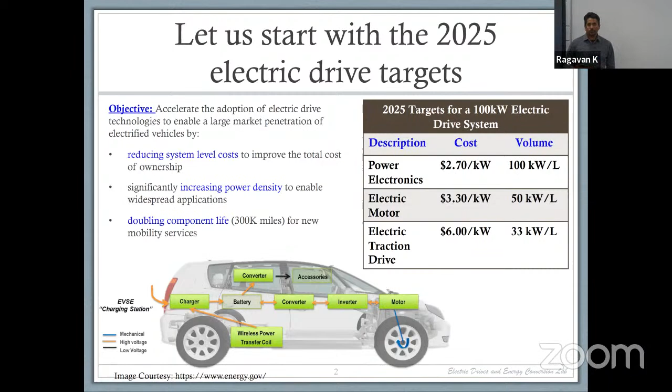So like I said, even though our expectation was the same, we now have drive cycles. But the problem is each of these vehicles has a different driveline target. What this basically means is that you might be looking at 15 miles per gallon for one situation, but they don't start and stop at the same time. They don't have the same weight distribution. So our goal for 2025 compared to 2015 basically means we have lowered almost all of our metrics by quite a bit.

I also have a comparison of 2025 and 2020 that you will see later, and you'll see specifically that we are still aggressively pursuing numbers that make us have to control or innovate to create the right outcome. So in terms of power density, what you see here is that we have an 843% increase, which means you're going to go 8.5 times what the numbers were barely 10 years back. Actually, 7 years back even now.

Power level, we want to double it in 10 years. We want to have about 100% increase in reliability. So now we want our drivetrain to last us 300,000 miles, not just 150,000 miles. And the power electronics is going to be 50% cheaper. So as you can see, we want everything to be higher except for the cost, which we want to cut down in half.

Without a doubt, you cannot create a solution that fits all of these metrics without looking at the overall system. So we looked at different ideas of what we could do. We touched on individual components. We looked at thermal management, NVH. We looked at windings and steels. We also looked at an idea of integrated drive design. Actually, we looked at it a little bit. We talked about controllers and power electronics.

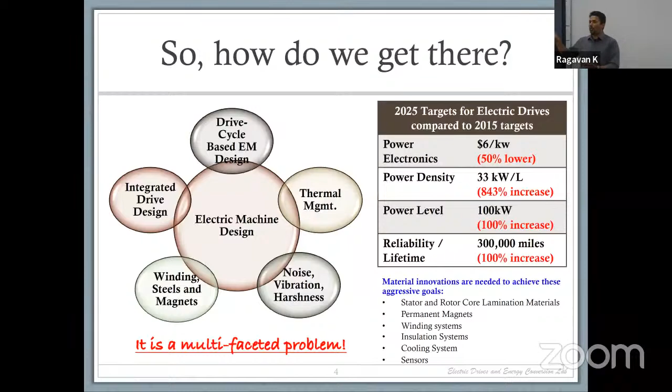What we're going to do today is we're actually going to combine these last pieces. This is just a vision that I have in terms of how I would want to achieve something like this, and I'm more than happy to get some feedback from you. So the idea of the integrated drive framework really is to develop a flexible and time-efficient framework within the optimization framework that also considers the drive cycle. You want to include the multi-physics domain, and you also want to do current shaping.

Like I said before, you cannot do it sequentially, because sequentially it is difficult to manage one without adding a ton of time to your simulation time. So the approach really is you start with the drive cycle, you create the surrogate model, and you do this coupled optimization. We talked about this yesterday. Today we are going to bookend this topic with the first and the last task in this project.

But the idea really is, for the 2012 drive system, $30 per kilowatt, to now 2022, we had $8 per kilowatt. And now we are trying to go to $3.30 per kilowatt. So the numbers that are changing are quite aggressive, which means in order to achieve this outcome, we need to have highly efficient motor designs. We need to have materials, which is not something we are focusing on right now. We need to have manufacturing methods, thermal management, additive manufacturing, and high performance computing. We are trying to focus right now on the first and the fourth topic for the purposes of this project.

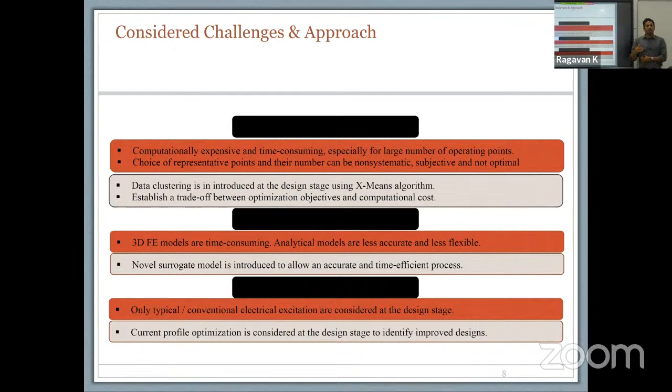So basically what you're doing is something like a Newton-Raphson method, like I said before. It's just like what you do for power systems. You don't necessarily have to know the answer. You just know what your boundaries are for each one of them. You keep iterating until all of them are within the error tolerance that you have. And once you meet all of them, you're good. It doesn't have to be the exact number. And depending on how many iterations you go for, you get that much closer, right? You're basically converging to a solution.

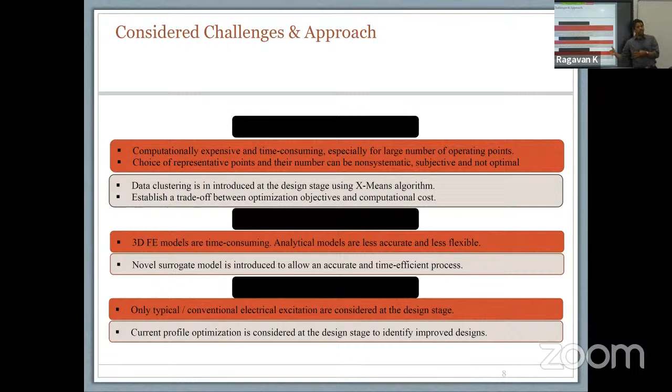The idea here is quite similar. You're trying to converge to a solution, except that instead of doing a ton of simulations, I'm converting that into a bunch of surrogate model-based drivetrains. So this is now where we are going to start. We start with the drive cycle. The drive cycle actually gives you a torque speed profile. The torque speed profile gives you what's called RPs, or representative points. So let's start with what it looks like.

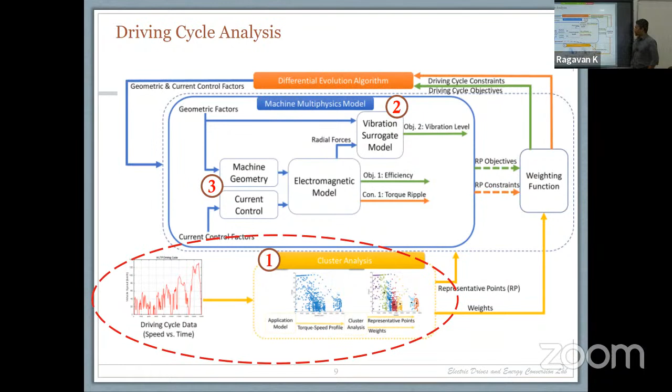So the optimization can basically have a single or multiple operating points. Why? Well, because that's how your system could be. You might end up with a system in which your point clusters are close. There's only 2 of them, because it mostly operates in these 2 modes. It could be something like an HVAC system where you don't change your operating speed very much. But in a drive cycle where your speed versus time varies so much, you end up with a torque speed spectrum that moves around a lot.

So this is the WLTP drive cycle, now translated to this torque speed map. What this tells you is that if you are designing it for, let's say, the torque speed profile that you would normally have, oh, sorry.

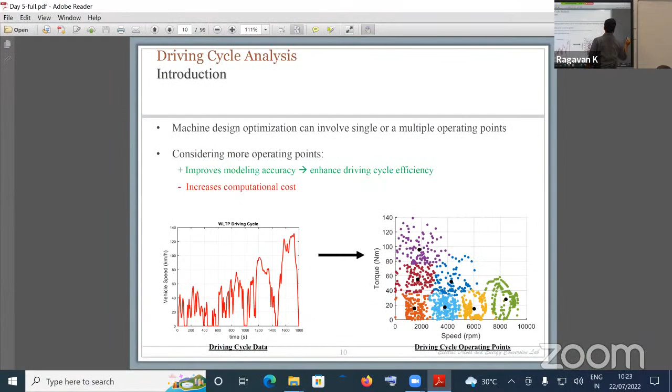Okay, so if you had designed it for something like this, if this was your torque speed profile, and this is what you had originally done it for, you typically have designed your motor somewhere around here, right? Instead, now what's happening is, if you design for this motor, now look at this here. This point here, the high speed operation, doesn't happen that much. The low speed operation, now you're designing it for this point here.

So let's say you have your highest efficiency point somewhere here. You're operating a lot in this region. So now you see you are fairly distant from your highest efficiency point. So if this was, let's say, about 94%, this might be somewhere around 90 or 89%. So you see what happened here. It's not that the original design was wrong. It's just that it was not designed to be optimal for your given system.

So what we are talking about basically is converting this into a map where you look at these clusters. So you create these clusters here. There's one cluster here, one cluster here, a small cluster here, a big cluster here, a small one here, and a small one here. So keep in mind, the cluster is not necessarily sitting on the points. It is coming from the points where it operates. You're trying to get a point that is most representative of what your operating points need to be.

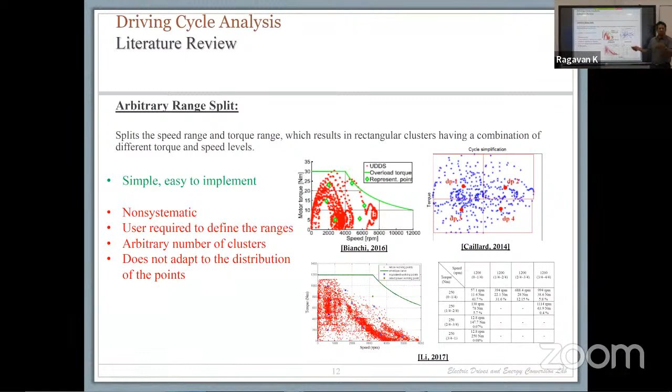So I guess at this point, the point I'm trying to drive home is the fact that you need to start having something that is repeatable and can actually be verified by somebody. You cannot have somebody who comes in and says, no, I know this better. It's not like driving a car. It should not be so arbitrary that somebody can always do it better than you. There should be a method to the madness.

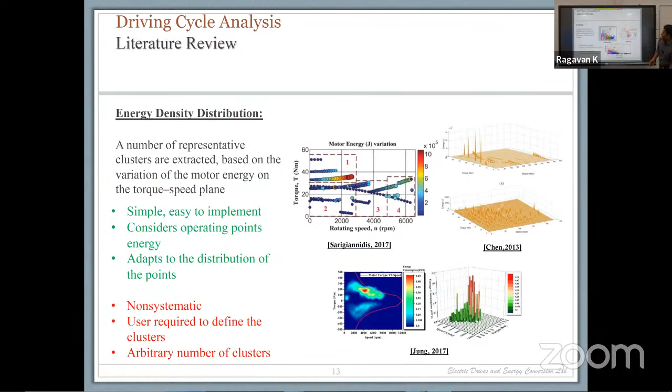Okay, so the next one basically is called k-means. So k-means actually is an interesting idea. This is where we initially started. We started with the idea of creating k clusters. The idea was basically you create a predetermined number of clusters. So in this case, you have k clusters where each point belongs to the cluster that is nearest to its centroid. So the idea itself was reasonable. That was where we wanted to go.

So there were several people that had actually done something like this, where they look at each range that creates that cluster of points, and they assign a value to it based on the magnitude. They calculate the centroid and say that centroid is basically my point that I'm using. It is a systematic approach. It does adapt to the number of points you have, but you are still defining k, which means somebody is telling you how many clusters to go with.

Now the question is, how do you define that? We're not saying it's wrong. None of these methods are wrong. All of these methods work. The question really is, what is the optimal method that you can establish that creates something that is repeatable and reproducible? And as a consequence of k, your number of clusters remains arbitrary. Right? So I'm hoping at this point I'm making sense more than trying to convince you that this is the way to go. That's not exactly what I'm saying at all.

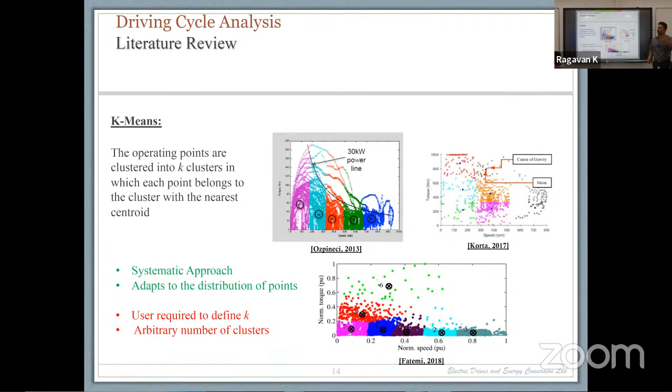I'm just saying, look at your system. You have your overall objective. Look at the system before you start designing. If you start designing and then hope you hit the number you want, there's a very good chance you don't. So x-means is the method that we actually used.

X-means essentially refines the cluster assignment specifically. It keeps breaking it down into subdivisions, and it keeps the best resulting splits until you get a Bayesian information criterion. That's a big factor that you get. That BIC is basically the point that tells you how many clusters your system should have. So it keeps splitting your clusters over and over again, trying to figure out if you get the right number of clusters, will this still represent the points you need?

The benefit is that it's systematic, which means you get a significant gain in accuracy and computational cost. It adapts to the number of points. It gives you the optimal number of clusters, and compared to visual inspection or any of these methods, it gives you a much more thought-out approach that is user-free, and the optimum number of clusters is automatically determined. So you don't have to select how many you need.

We actually did a comparison, specifically showing what happens if you have more than that number of points. It's something like harmonics, right? When you do harmonic analysis or Fourier analysis, you go up to a certain number of terms, right? The order of harmonics you pick, 3, 5, 7, 9, whatever it is, and then at some point you say, if I add more, it's not going to change anything. Sure, it'll give me the 4th decimal point of accuracy, but I can live without it.

Same idea. So you're basically saying, I could do with 7 points, but do I need 7 points? What if I could get by with 4? How do I make sure I'm doing that? Because keep in mind, it's not only electromagnetic. I'm taking it from electromagnetic, coupling it with vibrational, taking it to acoustic noise, and doing thermal, which means every single one of my points is going to cost me a lot of time and a lot of resources. So I cannot afford to do that many times.

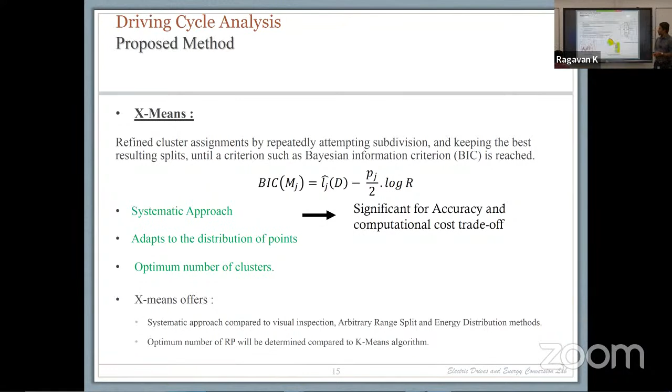This is actually one of the examples we have. By the way, we have papers that you can take a look at later as well if you want. So the idea was we took an IPM and we wanted to create a method for doing analysis to see how my operating point would change, how my performance would change if I used each one of these methods.

So we did the optimization on a single operating point. We did it on x-means, which gave me 2 points, and then we went to k-means, which gave me 7 points. So our method says 2 points is good. K-means says, well, based on the clusters, based on what I'm seeing here, if you go back to clusters, that's this one here.

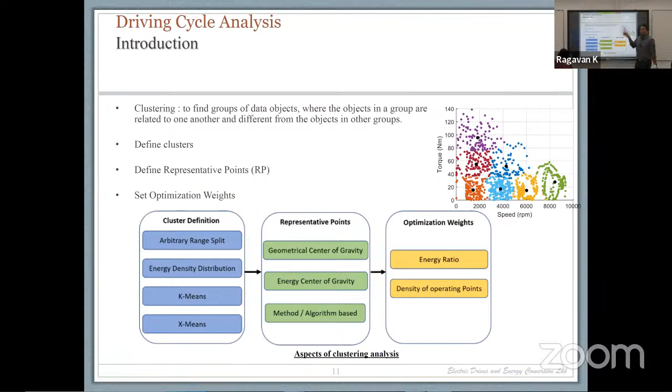This one. You see this: 1, 2, 3, 4, 5, 6, 7. There's 7 points here. So K-means, by visual inspection, or basically when you broke them down in terms of the centroid, you said 7 points, that's a good representation. But we said, based on our calculation, we found that 2 could get the job done. Once again, it's a starting point. You might not get the right answer, but we had to see what the variation was going to be.

The application was for an IPM for traction, electromagnetic model only, because we had to start somewhere. And then we did 12 design variables for geometric optimization, and your drive cycle was still the same, WLTP. What that means is that we are trying to look at 12 components of your design spec. So you're changing the rotor length, the back iron, the thickness, the arc length. So you defined 12 variables that we wanted to optimize for.

Keep in mind, now those variables are being optimized for electromagnetic. You will then also be looking at vibrational. You'll be looking at thermal. So that many design variations, looking at every one of them is definitely going to be time intensive. So here are the points here. It's the distance between the magnet and the rotor OD. You have the notch that was created. You have the length of your slot, the pole, width of your pole, the back iron. So you had a bunch of variables. We defined 12 of them.

So based on that, we essentially calculated what our drive cycle is going to look like. And if you break it down, this is your cluster, right? So when you look at this breakdown, this looks easier to spot where the points could possibly be. But if you look at something like this, the colors, in my mind, kind of bias you just a little bit. Because when you look at the colors, you start looking at those colors clustered together. You look at the same points without any filtering, then you kind of think that maybe there's only a few points that you need to work through.

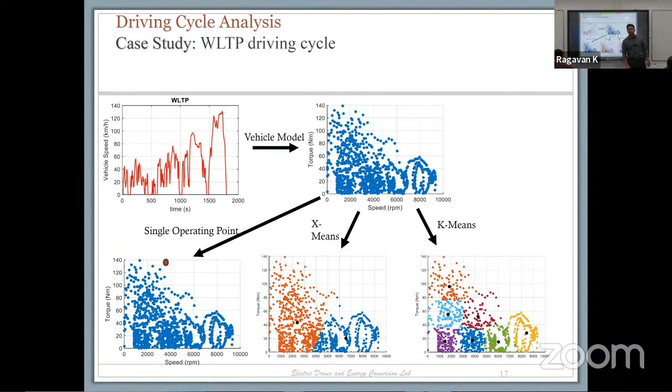So instead, you can see this one with blue comes out at 2 operating points that we defined. So we said this point here and that point here should be able to represent our values accurately. So this is the overall torque speed profile that you get versus efficiency for all 3 of these methods. If you do the design for a single point, you see your optimal point is somewhere around 4,000 RPM. When you go to x-means, you're still around 4,000 RPM, but that range has gotten wider, it's gotten bigger. If you go to k-means, once again, 7 points, it's still big.

But guess what? When you look at the numbers in terms of efficiency, x-means and k-means gave you nearly the same efficiency. So I'm not saying x-means has to be better. I'm just saying it has to be faster. Because I'm not just looking at how efficient my design is. I know most designs work. If you use FEA and there is no visual inspection, you just keep designing the motors, you will get a good design eventually, right? It's just a matter of how long all that takes.

So what we found out here basically is, in terms of the normalized computational cost, your k-means actually took 1. Your A, which basically was single point, took 0.11, and B, which is our x-means, took 0.25.

So that's the computational cost. So clearly x-means is more expensive than a single point. But then we knew that. I mean, the first one had 1 point to be evaluated for, the second one has 2. So there's no surprise there. Average efficiency here 96.4, 96.2, 1 point is 95.2. So this will start changing.

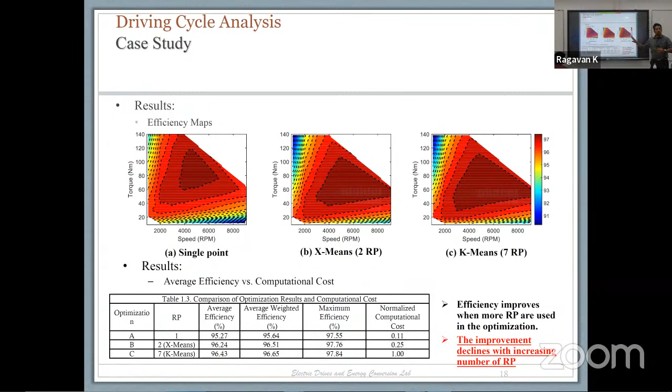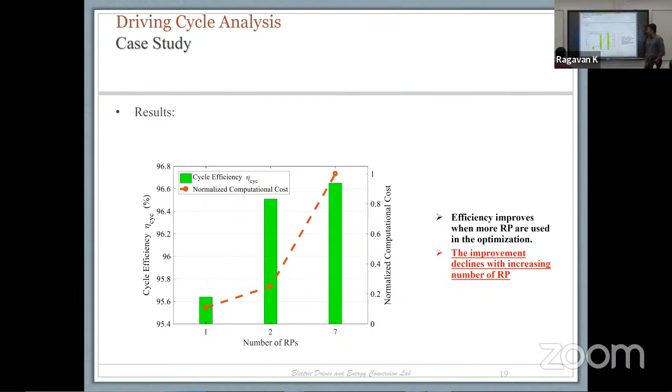Okay. So based on that, basically this is the efficiency improvements when you have more RPs, where your cycle efficiency goes up, but your normalized computational cost goes up along with it. So you're not necessarily benefiting in terms of the improvement that you're going to get from one to the other. So going one step further, these are the relative efficiency maps that you're getting. And if you look at the clustering that you get based on the optimization, you can actually design your motor for the operating point and evaluate the behavior.

So the intermediate conclusions here basically were that you can have a method that gets automated. So if you have design criteria that have been defined for you, you can put that into your model, allow it to calculate how many RPs you need, and come up with a time efficient calculation method that fits into your drive cycle algorithm.

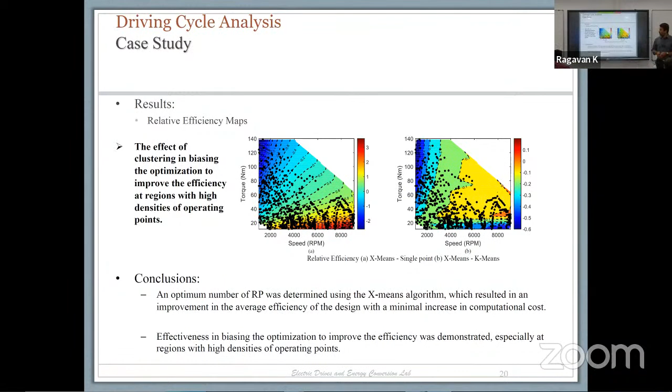Take it one step further. So now we talked about the front end, next the back end. The back end basically is the optimization. Like I want certain current, I want certain design, I want certain control. I want to combine this. This idea basically was something called simultaneous coupled optimization. It basically means we have coupled both of these behaviors. We have the electromagnetic and we have the control behavior.

We combine them together. You have a current profile variable that is given to your system, the controller, and then you have geometrical and typical profiles given to your design. You start to optimize them simultaneously, and the coupled approach basically means your geometry and current profiles are considered at the design stage, while the constraints are provided to your current profile optimization. So you have a nested system here where you basically create a current optimization for each design.

So you run a design, run an optimization, and then take the next design, run an optimization. So it's a simple nested idea. We do this in Simulink all the time, right? You basically create a nested loop, one loop on the outside, one loop on the inside. But it's never possible to do this kind of a design procedure because FEA takes a long, long time. You cannot run an optimization for every single point of FEA if you do this.

And that basically gives you this combined framework where you can give geometric design variables, and then current variables, and get a final design directly from it. Yeah. Can you repeat that question?

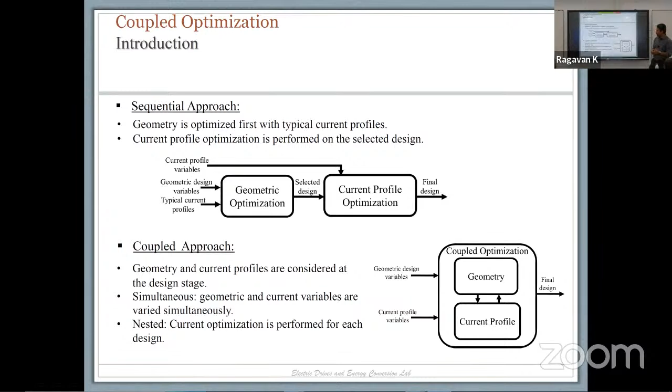So the proposed approach basically, to your question here, is that you have the optimization for the geometry. It's done primarily with sinusoidal currents, right? We always assume that the currents are going to be sinusoidal, which means we don't look at the harmonics. We don't look at the third harmonic, which is the dominant frequency. Your ideal waveforms with no harmonics basically would be sufficient to get a smooth ripple-free torque.

Great, except that it doesn't work because your system will not be smooth and ripple-free. There are going to be harmonics in it, and you have to take that into consideration. So all your methods basically have to have specific injected harmonics that you're going to use.

So the idea basically here is that you perform a current optimization on the geometry, and if you do that, you will not necessarily get a combination. It's like a matrix of geometry versus control to see which map fits the option best. And that's what the goal is.

So simultaneously, you introduce both the geometry and current, and you essentially give the designer one extra degree of freedom in the optimization process. That means they can decide what the geometry is going to be while they are deciding what the current is. So typically, when you're doing a controller design, you don't have that degree of freedom. Geometry is not a luxury you have when you're designing your controller. So this gives the designer one extra degree of freedom, where you can use current to control the geometry, or you can use geometry to control the current, as the case might be.

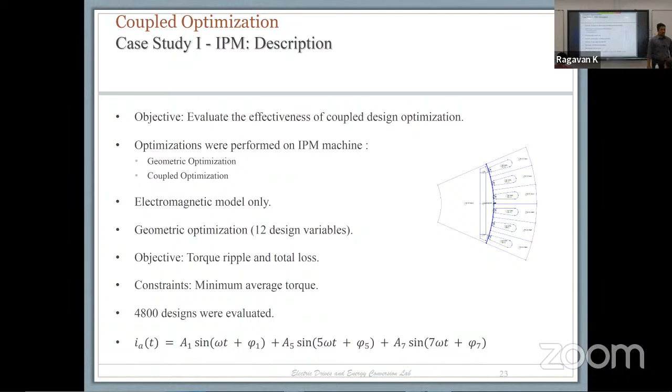So, okay, this is the IPM description that we had. We had geometric optimization, coupled optimization with the two methods. We had the electromagnetic model only, and this is the equation. We evaluated 4,800 designs, so the number of designs we evaluated was pretty high. So we came up with the Pareto front that goes with it. This is geometric optimization. We defined the Pareto front that goes with it, and we did a coupled optimization like what you were saying as well.

What we did was we compared geometric optimization with the coupled optimization to see what the performance results are going to be. When you compare the candidates for coupled optimization, you get a torque that is closer to the first geo method, but the torque ripple is much lower. In this case, we were trying to optimize it for ripple. Why? We had to pick one criterion. This was establishing or validating whether or not the method works. This was not necessarily designing the motor itself.

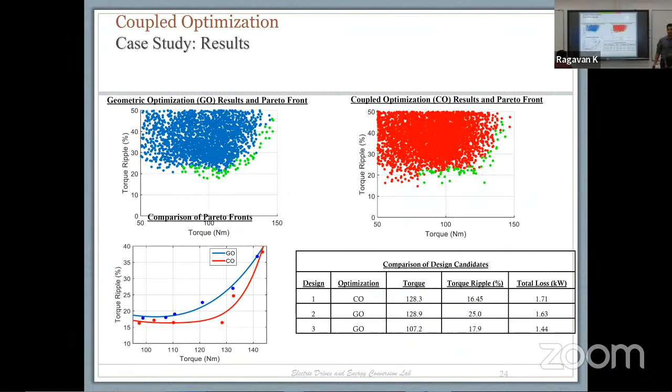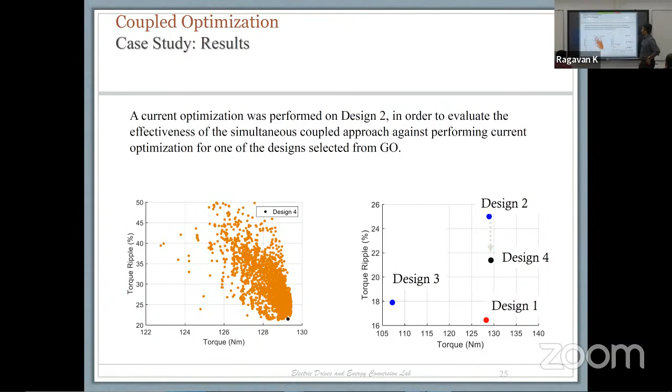So based on that, we basically used design 2 and came up with a specific coupled approach that you could identify. And we took that one step further to do this for an SRM. So what you saw yesterday also was a surrogate model we created for a switched reluctance machine. We applied 10 variables. We wanted to look at total torque, average torque, and the total losses in the motor, and we evaluated 4,800 designs.

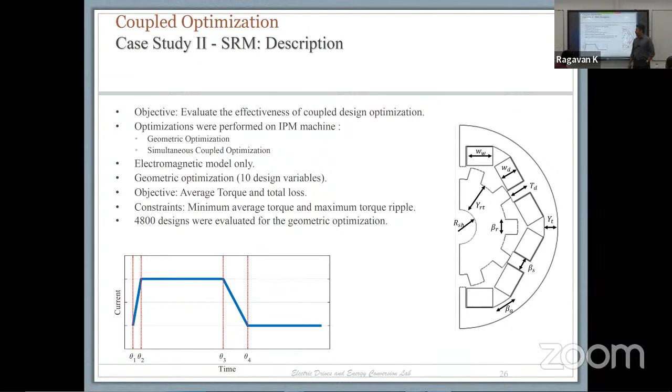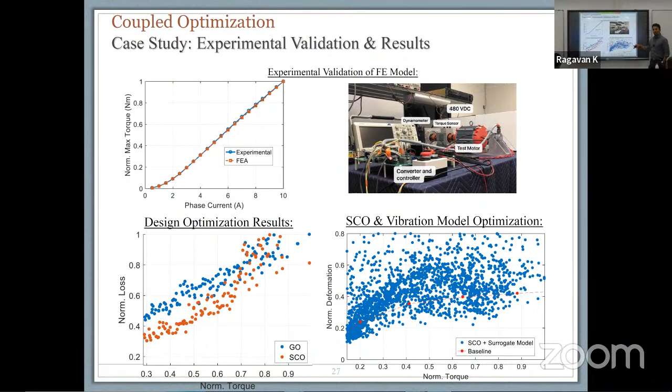We had a test setup here as well, and what you see here basically is the maximum torque actually follows the experimental profile very nicely for FEA. We used the same profile, and we identified what the SCO and vibration model from yesterday, what that optimization looks like. So based on that, what we identified in terms of observations was that the drive cycle integration into our design process allows us an extra degree of freedom. It means you're able to use data mining and statistical methods to establish a trade-off between how much time things take and how much accuracy you're going to get.

And based on the surrogate model, we actually got a much better vibration behavior, and the method itself shows that it's possible. You have to develop them individually, but once the model is set up, the computational burden on your designer is going to be substantially lower. Any questions in terms of what you have?

So I just want to add this slide here to go over the value proposition for anybody who wants to look at this. You have a shorter lead time. You have a bunch of late design modifications, like what you said. I think one of you said that you have existing data and you want to change something now. Can I change it? Yes, you can. So it actually allows you an option to change the variables without going back to the drawing board entirely. You might be able to make small disturbances in your design process. So it's going to be very good for drop-in replacements.

So if you have an existing motor that you want to design the controller for, and you want to say, I want to keep the same stator because the winding and the stator I want to keep the same, but I'm okay with changing the geometry of the rotor. So tell me what I should do. What would be the best method? How much skew do I need to get? Where should I place my flux barriers? Where should I put my slots for the synchro?

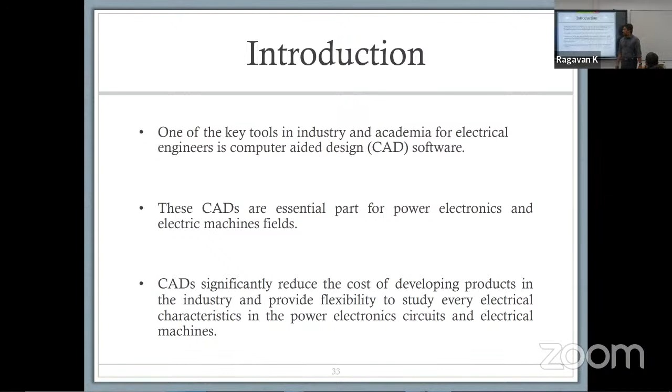So the idea was basically, the CAD we were using here was for power electronics and electric machines, but then we modified that to get HEVs. Previously, we used to build our own domain, and once they released the HEV suite for PSIM, we started using it. So oftentimes, simulation software really relies on mathematical models. They are behavioral models.

If you want to look at vehicle simulation models, you have software like Autonomie. Autonomie is developed by Argonne National Labs. There used to be an old one called ADVISOR, which was developed by the National Renewable Energy Lab. Autonomie is not free. It is actually available at cost from Siemens. They manage it. ADVISOR used to be free, but then they discontinued the software, but it was free vehicle simulation for quite some time. Of course, Simulink has its own version now, and PSIM is the one we've been using for quite some time for our courses. So I just wanted to quickly mention that.

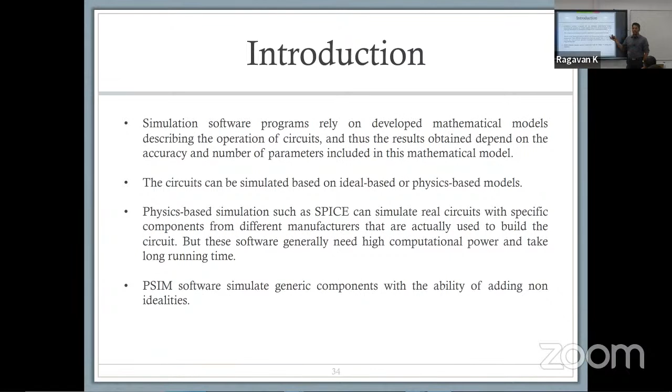So sometimes these can actually be models when you're talking about simulation or co-simulation, in which you embed the model into your software to allow it to run in a system mode. It can be done. So they actually have a tool that combines with JMAG. They also have something that combines with Infolytica.

Which I should mention, I have no connection to the company, so I'm not talking about them because I know them or I have some stake in it. I'm absolutely unbiased. I'm an end user, that's all I do with it. Just want to make sure it's very clear. I have no interest in whether or not you choose to use it.

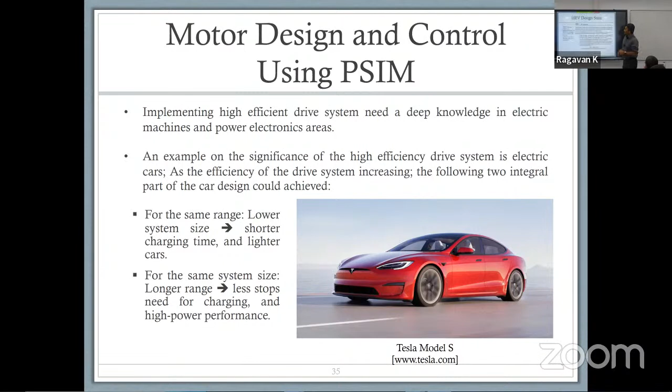So the HEV design suite, really, this was the one that I actually liked. The idea initially was that towards the end, I was hoping we would do something like a demo in which we could run the simulation, but knowing that doing it over video in real time would be challenging, we created this handout that allows you to go through it. So it really is a dedicated tool to design and control your power electronic drivetrains for different EVs. And the goal, of course, is that you can have different models. You can have an HEV, PHEV, HEV nonlinear, and PHEV nonlinear.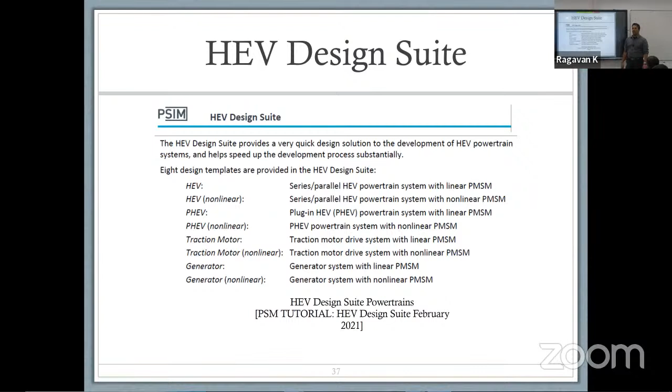And the goal basically is whether or not you are looking at a drivetrain that has a linear or a nonlinear model of a PMSM, so whether your magnetic field is changing or not. So based on the drivetrain that you need, essentially you can select what kind of motor you want.

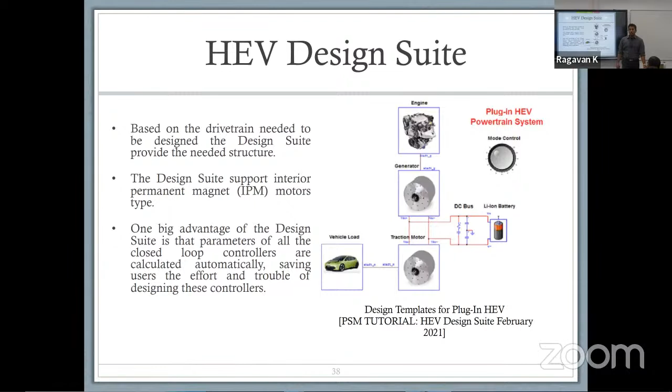You have the engine generator connected, the DC bus, and this really is the plug-in hybrid electric vehicle. So you have a grid-tied system, you have a battery that connects to it, and the benefit basically of this suite is that all the parameters of the closed-loop controllers. So basically, you can put the number in, run the simulation, get the results, and whatever you get, you can go ahead and verify whether or not it works.

So this part really was, we actually use some of these models. We also use them in some of our labs as well. We have built an electric vehicle and an HEV emulated drivetrain specifically, because we wanted to let the students apply their own torque profile. So it has a gear, it has a brake and a throttle. And students can actually apply a drive cycle based on what they see on the manual.

And based on that, they can look at the state of charge, the depth of discharge. They can look at the energy, the current profile, and that kind of stuff. So that's part of the hybrid vehicles course that we have. This basically allows you to look at the drivetrain design, and you can look specifically at the variables of battery voltage, battery current, speed, torque, and such. They have a model specifically for the Nissan Leaf, but you can do the EV powertrain.

And just to give you an idea of what this looks like, this is an example where we had an HEV tool for the design suite. You have a battery model, the traction motor, the DC bus, vehicle load, system parameters, and of course you have the simulation clock on top. And the goal really was to make sure you are doing a pre-design check to see what you are going to design and for what, and how it's going to look.

For the HEV, they actually have a couple of vehicle models, I think, that they use, but this allows you to look specifically at the traction drive where you have a battery. The only challenge is your battery model is not going to be as accurate as you want it to be, which means they will have a generic model unless you know the internal specs for the battery. That can be a little different from what you're going to get in real life. The same thing with the traction motor as well.

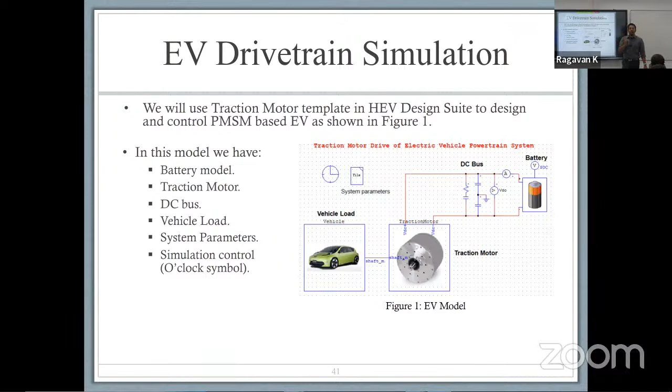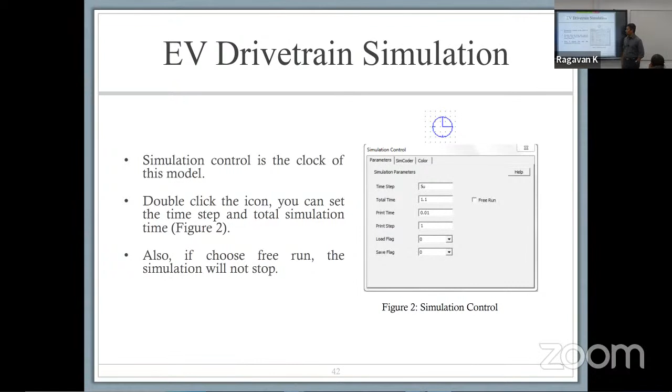Like I said, I'm going to show you what this looks like, and then we'll move on to the future outlook. So you can do the simulation clock. Once you go in there, you can actually develop the simulation model. And if you choose free run, the simulation will not stop. It will just continue to run the entire time.

So the system parameters block really is a text file. It is essentially just like your MATLAB M file. If you double click on the icon, you can actually change the parameters, which is what you see here. So that's the flexibility they did not have before, which we actually liked. It allows you to change a lot of the parameters. You can go in and change specifically the shaft time constant, the motor variables and such.

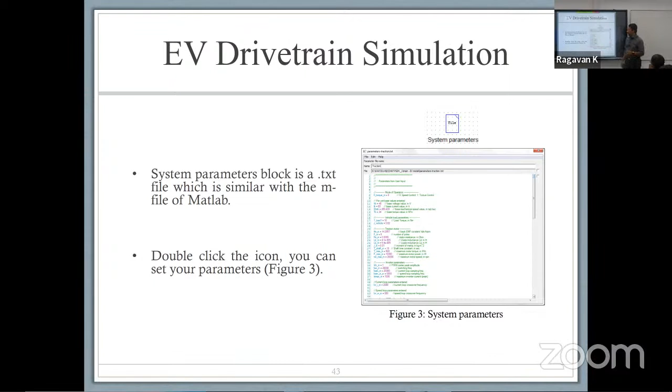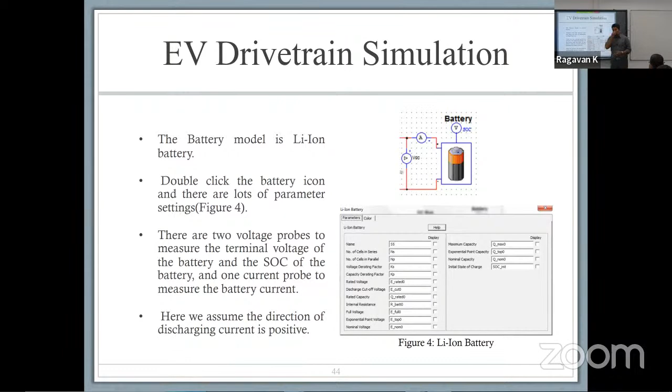The battery we used was a lithium-ion battery. You can change some variables, like I said. You can set a certain number in series, a certain number in parallel. But that means if you have something like an 18650 versus a 21700, you only have so many variables that you can play with. So you have to select what numbers you're looking at, and you can place the voltage probe specifically to look at what your state of charge is going to be.

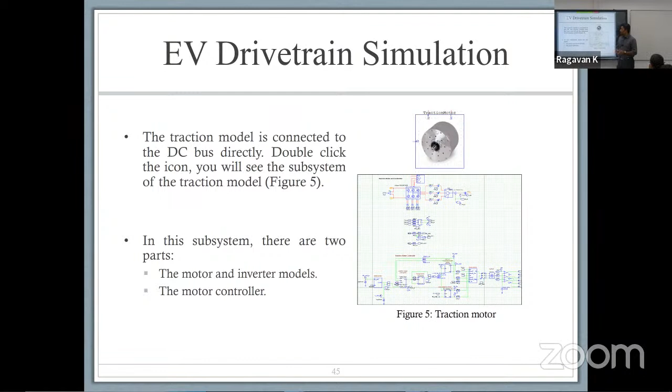In terms of the traction motor model itself, you can connect that directly to the DC bus. And if you double click on the icon, you will get this inside the traction motor. So you can actually modify the overall schematic of a traction drive, which includes a motor and the inverter, and it also has a motor controller. That's a typo there: the motor is a PMSM model, not PSMS. And the inverter is a conventional 6-switch 3-phase machine.

So in terms of the motor controller model, you can apply a speed and torque profile that sends a reference to the controller, and that basically takes it to the torque controller. So if you're doing something like what we just did, in which you want to apply a specific profile for torque and speed based on the design you came up with in your drive cycle based analysis,

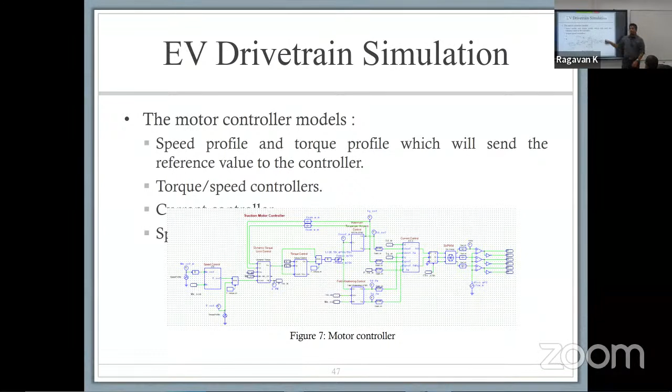you can put the number in. It will run a bunch of simulations, and it will give you the circuit level simulations, not just model level. For the EV, it will allow you to do speed control, and torque profile control as well. And the speed profile that we typically select for our case is piecewise linear.

I've had some questions in the past about what model we have used. I'm more than happy to point you to the models we have used. If you have any questions, you can let me know offline.

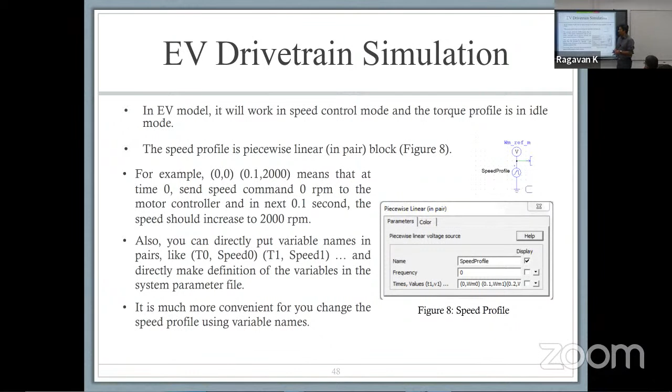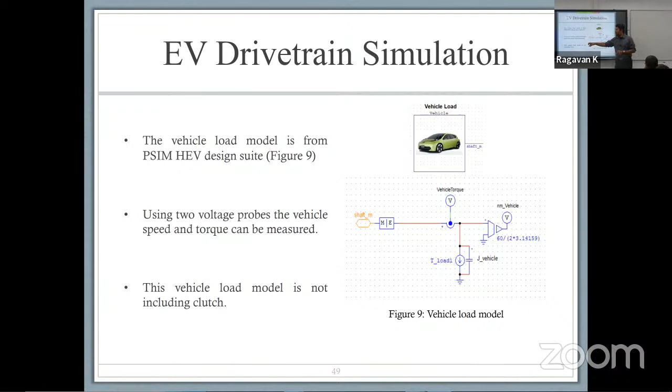You can also put the variable name, and the benefit basically is that if you do that, you can directly identify what your output is going to be without having to guess what waveform you're looking at. The vehicle load basically is from PSIM design suite, in which you can use 2 voltage probes and torque. We measured that. And when you take it further, you can apply the drive cycle for the vehicle.

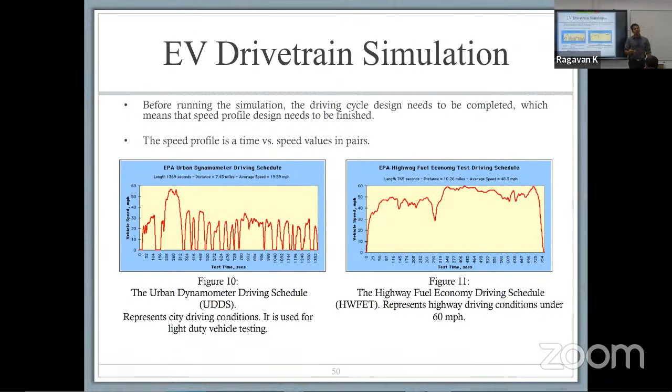Now, what it does is it looks at your vehicle drive cycle. It does not look at the drive cycle as it applies to your motor. So it has its own limitations of where you are going to be able to modify it. Now, if you wanted to do the drive cycle itself, you can create your own drive cycle specifically. You can actually define different parameters for it.

You can have base speed at a certain value. That's a torque speed profile. You can select your value, how wide it is going to be. So it does everything like an electromagnetic system without being an electromagnetic system. So it simplifies the system quite a bit.

And the reason I'm even talking about this is because a lot of times when you're doing the drive analysis, you either have to do co-simulation, like I said, or you have to do something like this. And as I mentioned to you previously, we have walked away from some FEA tools specifically to give us the option to do them using something like FEMM. Still FEA, but we're trying to simplify to make it open source, or basically free software.

This is not free, but the reason we're using this is because it gives us the flexibility of looking at each individual device. Whenever you create a model on Simulink or something like that, oftentimes it would be a small signal analysis, right? You basically create a model of the switch, which is represented by its on-state resistance.

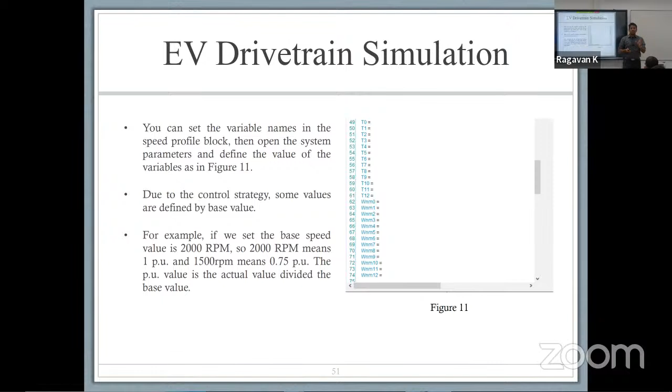You don't really have a switch, which means you might miss out on things like its turn-on spike. You might not have the overshoot from the turn-on. You might not have the inrush currents and certain variables that circuit-level simulations would have.

So to simulate it, we basically have to follow a sequence. You select the mode, speed mode control, put the actual per unit values, set your maximum parameters, and then of course, go into the drive cycle, set a simulation time, and run it. For the EV drivetrain as well, the same idea.

You can actually set, this is just one example we used. We set a base voltage of 48 volts, 80 amps, and ran the entire simulation, and you can set it to operate at a specific drive cycle. So if you do the simulation here, in that case, the EV gives you two specific drive conditions where it shows you what the torque is going to be in Newton meters.

And this is, sorry, time is going to be in seconds versus torque, versus speed in RPM. So you basically have a profile that looks like a drive cycle that you can simulate. We put this in, we just kind of gave it a relatively linear profile. You can change that if you want to.

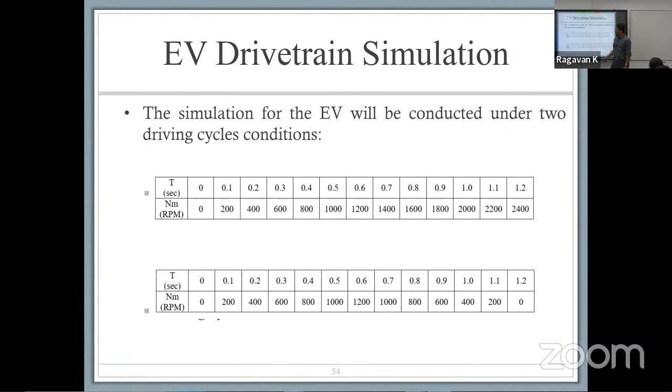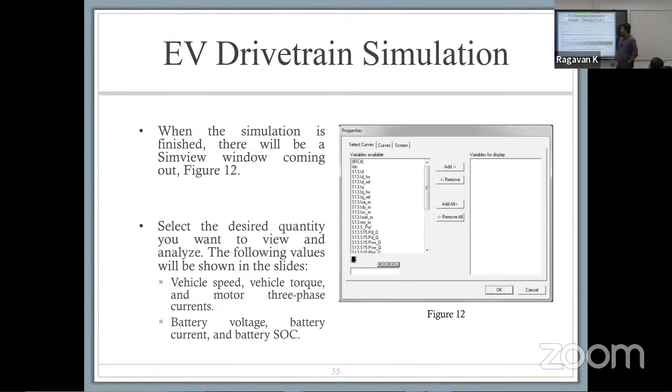The place where this actually is helpful is when you start integrating not just this vehicle model, but when you start dropping in FEA into it. Once you start doing that, then you are able to look at behaviors like faults, which normally, like I said, would also have an element of harmonics into it. So if you're looking at faults and failures in the machine, you can actually modify the geometry from a parametric sense.

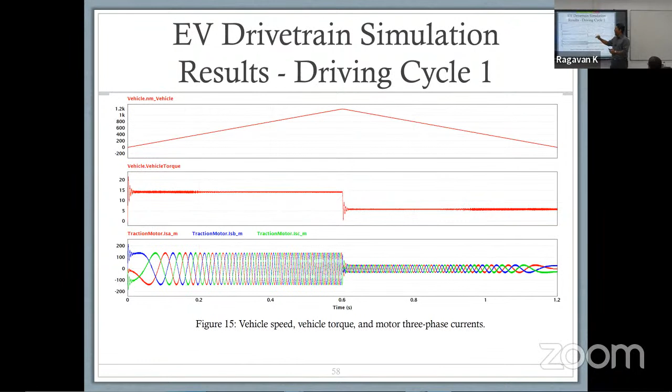In terms of drive cycle 1, we got the results here. It basically shows that the state of charge is depleting over time. This next time, we basically did the same drive cycle. We were now looking at the traction motor for phase A, B, and C. You can see that the load profile was changed at one point. We went from 15 Newton meters of torque to 5 Newton meters of torque, and the vehicle speed basically changed accordingly. The same thing we did for drive cycle 2, in which the battery voltage takes a dip, and that basically takes you to the next level of simulation, a hybrid vehicle.

I hope you don't mind the fact that I'm going through this a little faster, not because I don't want to spend time on this, but I just feel that this is good. I wanted to cover this, but I don't want to miss out on what we have done before or what we're supposed to do with the demo. But this just gives us a little more flexibility if I'm able to go forward. But if you have any questions, I'm here.

So this part actually uses a series hybrid electric vehicle, and this will be available. So if you want to go home and run the simulation, you can download the software or get the software from the company and use it as you see fit. This is a series hybrid vehicle. We actually do this for the engine model, and part of the reason is when you're talking about electric motors and you're trying to replace the engine with an electric motor, you need to figure out what your profile is going to be. So having a baseline model like this that allows you to simulate each variable one at a time allows you to determine what kind of motor and what the motor size needs to be.

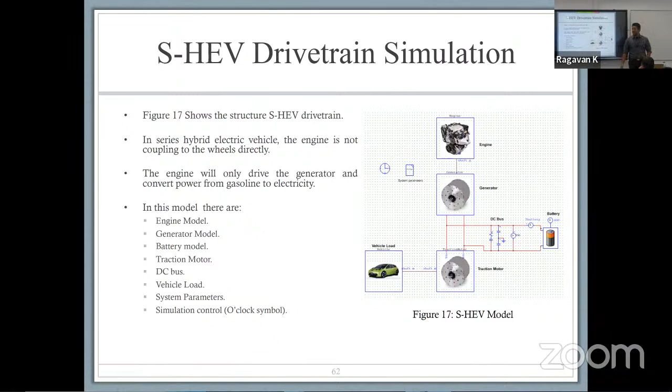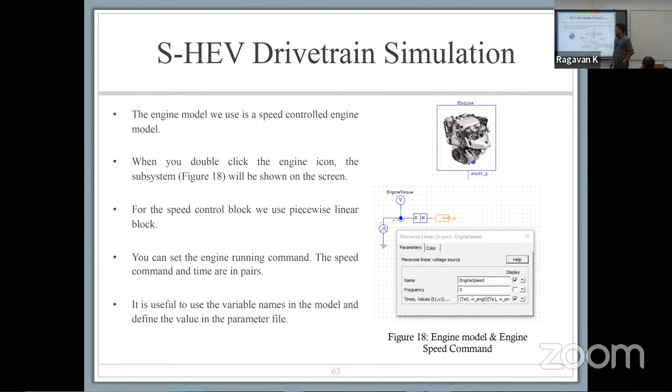You can also set up a parameter in which you limit the traction motor available and see what the performance, the acceleration and such, is going to be for the motor. You can use the engine model specifically. You can also import models that have been provided, and they're developing more of them as we go forward. So if you look at the generator inside, you'll actually see a detailed model that goes into the blocks, and you can modify the circuit as you see fit when you're doing the simulations.

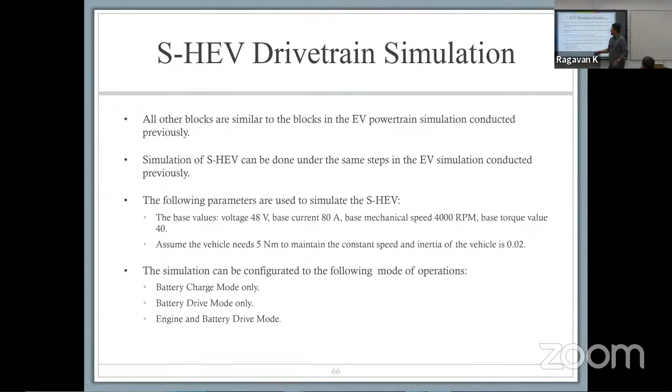You can set up the generator parameter controller model, see what outputs you want to see, and your input to the generator basically is connected from the mechanical side, and the output is connected to the DC bus and goes towards charging the battery. So if you look at the series hybrid vehicle, everything else is the same as an EV, not much different. And you can set the parameters specifically to run the simulations. The drive cycle is similar. It's basically a constant power that we are looking at.

So the battery profile, basically, this is the charging. It's running in generating mode. The engine's operational. Your battery is charging. The vehicle is moving forward. You draw current. And then at some point, the generator goes into coast mode, and your battery is not charging or discharging as you go.

You can also make the vehicle operate in battery drive mode only. We turn off the engine, just apply a switch to it, and it allows the engine speed to actually be equal to 0. And that allows you to essentially go into a coast mode in which you are using only the motor. So in a scenario in which you're trying to identify whether or not your battery pack is large enough to get the range you want, you have an AEV 100 or an AEV 300, which is basically all-electric vehicle range.

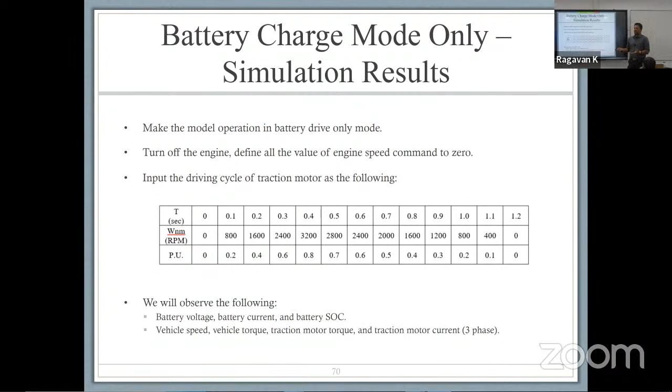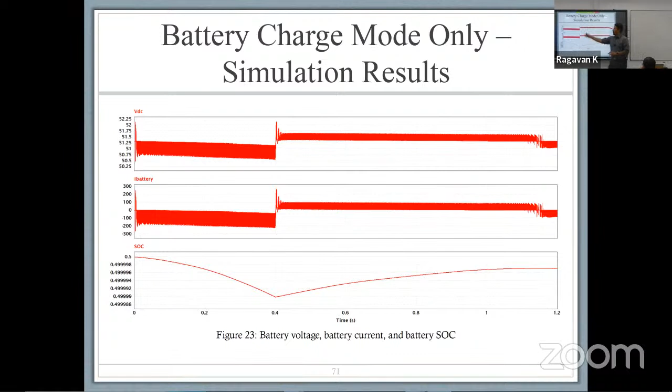You can decide whether or not it's going to be able to. This is the state of charge, battery current, and the battery voltage profiles. And once again, depending on the profile, when you change the operating point, your results change correspondingly. And you can also look at what happened to the motor. Was there a fault or failure that happened along with it?

The last thing basically is you can look at the generator torque, speed, the battery voltage, vehicle speed, torque, and the traction motor variables. This is all done in normalized quantities with a time versus speed drive cycle, where the engine was set to operate at a constant speed of 2000 RPM.

This is one example where I would really have liked to have you all have a simulation model where we could have done this one at a time so you could play with it as we are seeing. That would be a very good demonstration that I would have liked to do. Maybe at some point we can do this over Zoom if we get a chance to.

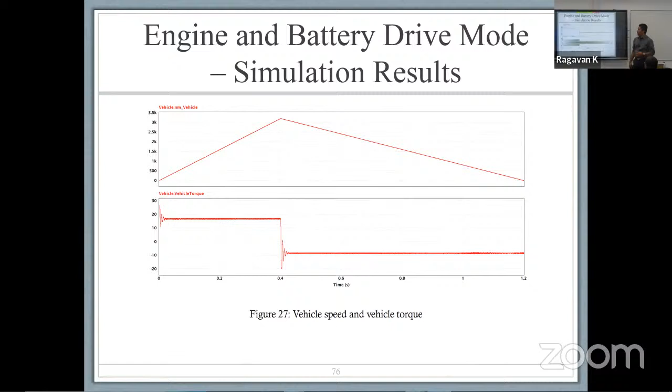You can also do this for the engine and the battery itself, in which you have the battery voltage, current, and SOC that you can identify, and that tells you what the vehicle speed and vehicle torque is going to be. From that, you can calculate the change in torque that you get. You can actually calculate what your currents for each phase are going to look like.

So that's where I'm going to stop here. I know I went super fast through this. This whole model is the... It's a number, so you can put in a number, but they don't design the transmission for you. They have a Toyota Prius model that is a lot more detailed, but it's difficult to look inside. You cannot look under the mask as easily. Correct. That's the challenge we found. So having something a little more generic without the transmission was okay.

What they have presented is basically a normal mechanical differential. Yes, correct, it's a mechanical differential. For the EV, I think it was single torque, so it would also be a mechanical differential. I don't think it's an electronic differential.

Four-wheel drive, you would have to modify. They do not have a model. I've only seen models for a rear-wheel drive or a front-wheel drive, which would mostly be the same model, but they do not have anything for a four-wheel drive that I have seen. They are normally open for you to ask them. The tech folks are more than happy to provide support. So it doesn't do everything. It gives you a good connection point with the circuit level simulation, and that's why I wanted to have this in there for a demo.

As you cannot export or import any model from Infolytica to PSIM, you need an analytical model for that. There's a plugin. They actually do have a plugin as well. They should still have it. They definitely have it for JMAG, but I think they used to have it for Infolytica as well.

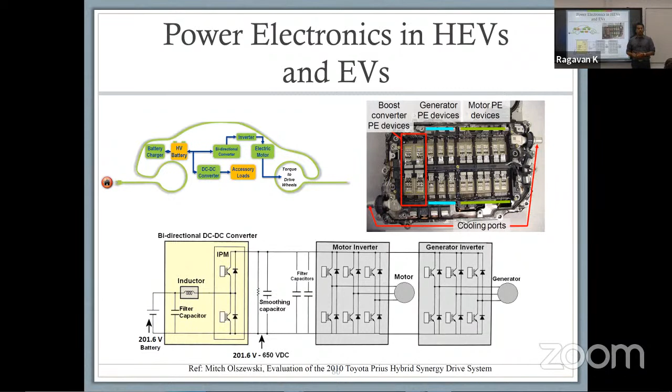So we've established that this trend is something that is a compact design. The Prius has done a really good job. So we're not trying to question what anybody's doing. What we are trying to ask is, what do we do next? Like right now, the question that came up is, where can I apply this technology? Where are the ideas? What are the improvements that we should be hopefully trying to accomplish as we go forward? So I want to start off right out the gate talking specifically about the challenges.

Let's start with that. So the first thing is, if we're talking about design of electric circuits or power electronic circuits, the first challenge that you always have is selecting components. You have to decide what kind of circuit you're going to get, what kind of device, wide bandgap versus silicon, selection of switching frequency, because that translates into losses, right, and cost. And then, of course, you have the selection of passive components. That takes you to magnetic elements that includes inductors and transformers, and also includes selection of a capacitor.

Selection of a capacitor might not seem like a big deal. There's a company called SBE Electronics, if I'm not wrong, whose entire business is building capacitors, electrostatic capacitors, and they're polymer film capacitors, essentially, if I remember correctly. But the point I'm trying to make is that selecting capacitors is a very big task when it comes to power electronics, in particular traction motors.

We'll talk about that. In EMC analysis, you can analyze the electromagnetic emissions, EMI. You can also look at the determination of switching transients and the optimal circuit layout, minimize parasitics, right? You need to identify how your system is going to operate. Mechanical and thermal design, you're looking at loss modeling, thermal management, and packaging. The last one in particular is not something that we talk about very much.

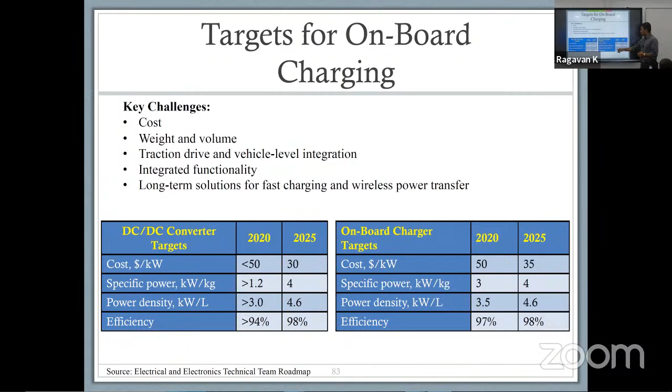For the onboard charger, on the other hand, you are going down in the cost. You go from 50 to 35. Specific power goes from 3 to 4. Power density goes 3.5 to 4.6. Efficiency, as usual, goes up.

So if you look at the traction drive itself, for a cost of $6 per kilowatt for a 100 kilowatt system, or a peak 33 kilowatts per liter for a 100 kilowatt peak system. So you're looking at the targets that we had in 2015, 2025 versus on road, and 2025 versus 2015. So you can see what has happened here if you compare the numbers we have today versus what we had 10 years back, but once again, this is the target. This is not what we have right now.

So 34% drop in the cost, 7 times, 7.5 or 7.25 times the power density. Once again, for the motor, we want to drop more than half the cost. And for the power density, we want to increase it by 9 times. Yeah.

So typically these are done by user groups who sit together to decide. This is done by the Department of Energy, and they come up with user groups. And as I understand, which I have limited knowledge of what happens behind closed doors, but generally speaking, they have several national labs who come up with their estimates of what would make these technologies like EVs commercially viable, what the tipping point is, and all of the numbers are calculated backwards. Then they look at where the current technology is and decide what that leap could be, based on what delta they see in the technology potential.

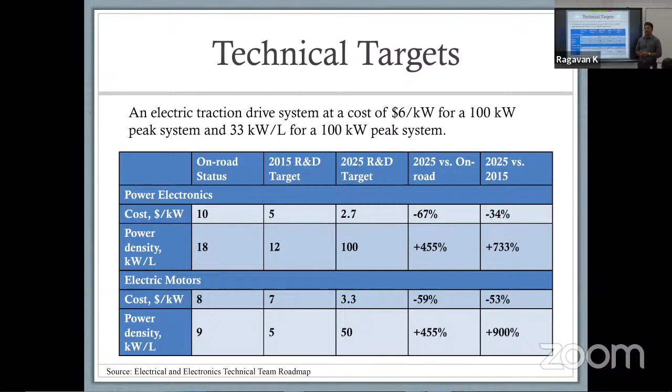So they look at the numbers and they reverse calculate, saying that we need to have this many cars or this many electric cars. In order to have that, the cost needs to be here for this many vehicles being sold. For this many vehicles to be sold, the motors have to be this expensive, and for them, the vehicle size has to be this small. So it's a long drawn process. It's not something they come up with overnight. So it's a fairly labor intensive process, and it's done primarily by DOE, but I believe it's done in collaboration with all the national labs and several stakeholders.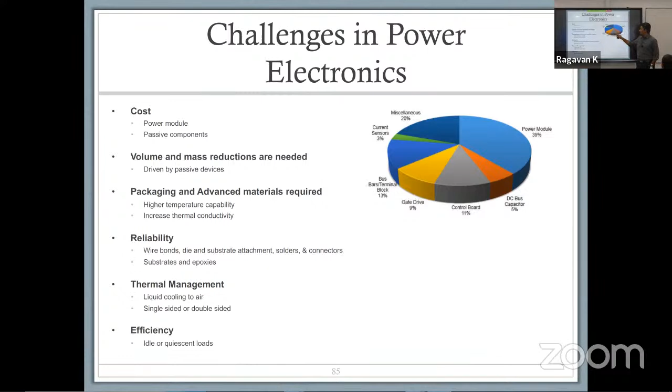This is the overall breakdown of what we think right now the cost of a power electronic system basically would look like. So the majority of the cost is currently being consumed by the power module. A very large component of that is consumed by the terminals, the block terminals, the bus bars, and then you have miscellaneous here, which covers everything else that is on the device side. You have controls that goes to 11%. So this is where currently the cost breakdown is.

Now, yesterday we had a question specifically about whether or not your sleeve could be conducting. So I actually did go back and take a quick peek at it just to make sure that I was not completely off. So yes, stainless steel definitely is one of the components.

So if you talk about the first technology that I feel is of relevance, of importance here, the first one is going to be high-speed motors. So when it comes to high-speed motors, your EV traction requires you to have high starting torque. You need to have acceleration requirements, high power density for volume, high efficiency for battery range, and wide constant range for having a single gear transmission. So if you're able to operate the motor, you can eliminate one gear set. If you only have basically a single gear transmission system, now your efficiency cascade doesn't get your efficiency down too much.

The challenges here are that because you're operating at higher speeds, you can end up with high voltages and fluxes. That's the challenge. The second thing is you have mechanical limitations. Keep in mind, when you're talking about bearing friction, you can have bearing losses that will directly affect. As you go faster, you can actually end up getting more losses.

You can also have ventilation losses to nonlinear friction, and you can have vibration that are caused by hysteresis. The second thing is when you go to higher voltages, because you're going to higher speeds, that causes you to have high stress on your power devices. So you need to have devices that can handle higher voltage levels, unless you want to actually combine them in series and parallel to increase their voltage or current rating respectively.

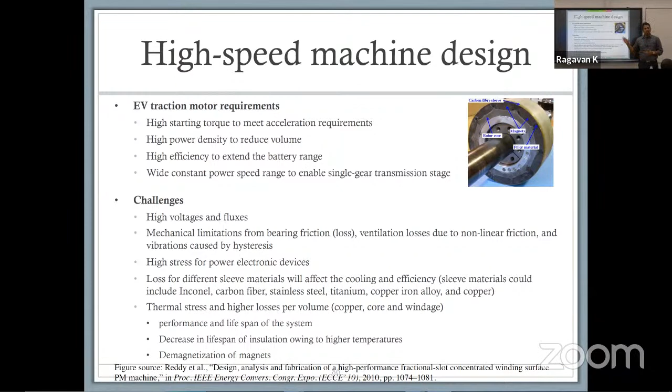So this one actually is from the paper by Reddy. It is a conference paper that shows the carbon fiber sleeve that is mounted around the magnets. Primarily, centrifugal force can make your magnet fly. That's basically what the job of the sleeve is going to be. Now, if you go to high speeds, you have some additional variables that you need to take into consideration. First and foremost, you have to look at your bearing. You have to look at the shaft that you're getting.

So if you're talking about high speed, you need to figure out what the resonant frequency of your system is going to be. This is basically for a high-speed PM machine and the entire rotor for the motor. So basically at what frequency they are vibrating at, the first thing you're always trying to do is move the mechanical system as far away from its resonant frequency, right?

So your possible mitigation techniques: you can increase the inner diameter, basically adding more stiffness. You can reduce bearing span. You can increase the shaft wall thickness, making it more rigid. And you can have a third center bearing, which will balance it out a lot better. And your modes will basically change.

In terms of managing high-speed operation, you can have a solid rotor for integrity. Rotor stress can be managed by managing the tensile strength of the material. You can have multi-level inverters that will allow you to reduce the total harmonic distortion, the harmonic content in the drive, and use wide bandgap devices.

It is very interesting to see that when we are talking about high-speed operation, everything starting from mechanical design all the way down to device selection has a role to play, right? You're talking about passive elements, the mechanical structure, the shaft size, all the way to wide bandgap devices at the frequency they operate.

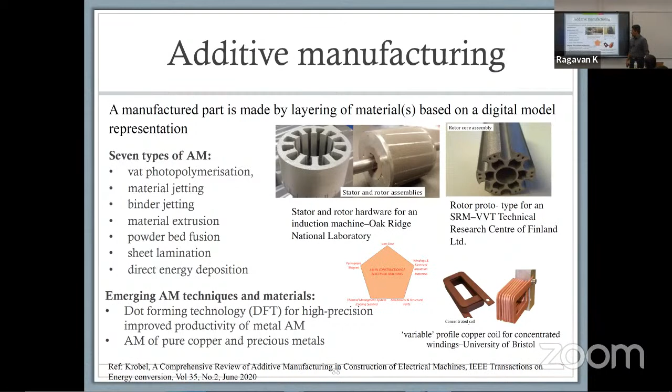So when you talk about inverter design, there are a few bottlenecks that you need to work through. The first one is wide bandgap devices. Wide bandgap devices at high frequency essentially would allow you to get the power density we are going for. You can also use a concept called segmented inverter. Has anybody here heard of a segmented inverter before?

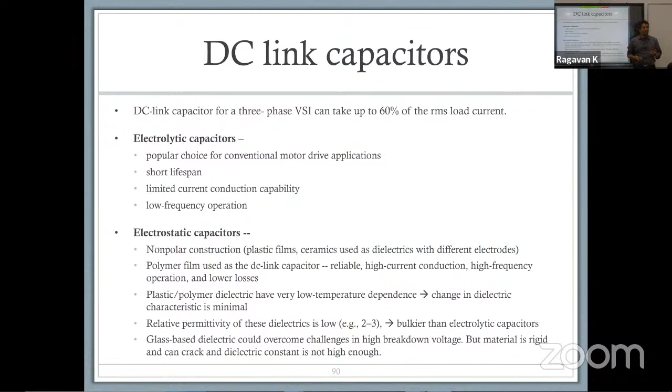The last one that I was interested or intrigued by is the idea of a glass-based dielectric. It tries to overcome the challenge that you get in terms of the high breakdown voltage. So if you're trying to operate the system at much higher voltages, in that case, you can use glass. It's got much better dielectric properties. The challenge is, like anything else, it's glass, right? Which makes it brittle. It can break, and therefore it is susceptible to damage.

One step further. Now we talked about the motor, we talked about the power electronics, we talked about a little bit of the devices. Now we are talking about integrating all of them together into one single unit. There are a few people who have done quite a bit of work, or several people who've done a little bit. But the idea of an IMD, or an integrated motor drive, is that you establish the power electronics inside the housing, right? You can have it either around it, or in front of it. Different people have done it different ways.

This is specifically a project that was presented by Professor Jin Wang. He's from Ohio State University in the US. The goal of an IMD is that you are able to remove the drive unit enclosure. You can have one single cooling system, so you can share the coolant loop through it. You can also eliminate the drive-to-machine power cables.

How is that useful? Well, I think we talked about this at the very beginning as well. If you have ever done a PCB design, the first thing you always want to try to do is minimize the cable length. You're trying to make sure you don't create a loop, because that throws out a lot of EMI. But by fundamentally embedding it inside the motor, you cut down the length of the cable quite considerably.

In terms of efficiency, I'm making a lot of mistakes, it should be boost. System-level efficiency boost can be as high as 30% for a drop-in replacement, which means by embedding your drive into your motor, you can get an overall increase of 30% in efficiency. This was done for a pump or fan application.

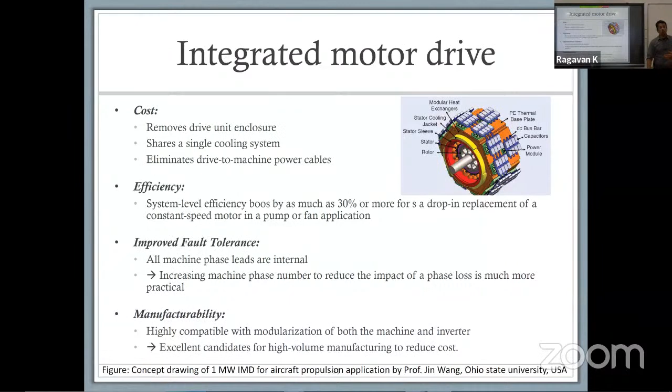One specific group at University of Wisconsin-Madison, no, that's not this one. I have another reference later. A group in Wisconsin-Madison is specifically working on creating a modular concept for these IMDs. They want to be able to add and subtract, more like a daisy chain, and convert them into not stackable, but ones that you can increase.

So in the integrated drive, if you look at the Tesla Model S versus Tesla 3, it's just a comparison of the traction inverters. The challenge tends to be that if you have high power electronics, reliability can be a challenge, which means you need to at least make sure these electronic units are going to outlive your bearings. If they die out sooner, then that creates a reliability and a life cycle issue.

You need to have improved inverter thermal behavior, because you need to make sure you can handle at least 200 degrees Celsius. It needs to be thermally rugged so that it can actually handle the repeated temperature swings. You don't always stay at a constant temperature. The engine gets hot, it gets cold, you operate in a cold environment. Unlike any other system like an HVAC or anything domestic, those are exposed to a very narrow band of temperature. This actually gives you a very wide swing in temperatures that the ambient the system has to handle.

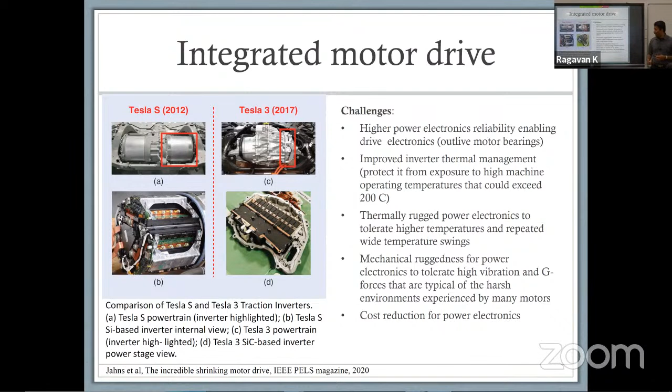You need to also be looking at cost reduction in power electronics. So the next one is actually 800 volts. We had a question about this as well the other day about what happens. Can we do 800 volts? Is anybody doing it? I actually did go ahead and update some of my slides because some of the information was available over this last few weeks.

And the current challenge, of course, is that we are trying to design a system, let's say for 50 kilowatts. Let's say we have a 50 kilowatt system that needs to be charged. So that would actually take about 35 to 120 minutes to charge the battery pack. Now, if you go from 50 to 150 kilowatts, you can reduce your charging time by about 2/3. Now, for the current level of voltage, which is at 400 volts, you will get 3 times the current rating. Okay, what does that mean?

It gets bulky. Keep in mind it's I squared R. Your conductors will have 9 times the losses. And that means it requires an improved cooling system. So you will have to redesign the cooling system for the given 400 volts. You cannot just run it at 400 volts the way it is and hope to get the power level that you're looking for, or the charging speed that you're looking for.

So in terms of the industry adoption, if you look at who's doing what, there are a few examples. Actually, I think even in the PDF, you should be able to click on that. The Porsche Taycan, for example, has an 800 volt DC bus. They currently have that available. They can charge up to 350 kilowatts, and it can go 15 minutes to charge an 87 kilowatt hour battery pack. ABB has what's called the Terra HP, which can charge both 400 and 800 volt batteries with a charging capacity of either 175 or 350 kilowatts.

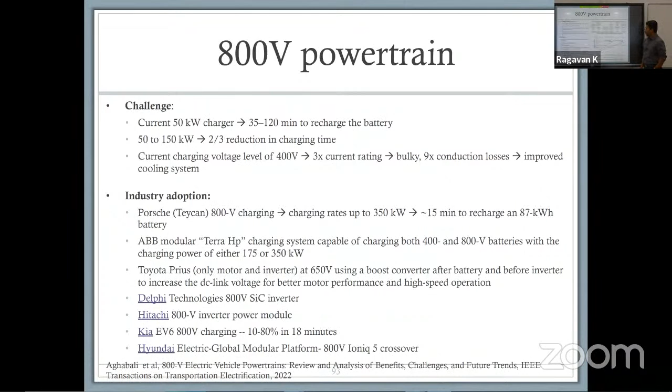So this is just an example once again for comparing the Porsche Taycan and the Model 3. The Model 3 basically has a 400 volt DC pack, and then you have Porsche that basically has an 800 volt pack. What you will notice is that in terms of the peak voltage, when you go for 96 cells versus 192 cells, obviously you're going to change the number of BMS units required, right? If you have 96 cells, you have a certain number of BMS units. You go to 192, you double the number of cells. Now your requirement on the complexity goes high.

So there's benefits absolutely by going to 800 volts, but it's not a free lunch. There's always going to be something that's going to get in the way, which means the benefits are you get better, faster charging. You get lower I squared R losses because it's V as opposed to I that you're pushing up. The power density of the motor goes up, wiring size goes down, and it is very good for heavy duty vehicles.

So it can be used for electric buses, it can be used for trucks, mainly because it can handle much higher power. Because previously, if you went for higher power, your current had to keep going up. Now you have given it more flexibility by pushing the voltage up. Now your electrification can go from a sedan and a small passenger vehicle to larger delivery vehicles. That's the enabling capacity for this.

The challenge, like I said, your components have to be redesigned. You designed everything currently that's in use with a certain thermal behavior, right? Your contactors, fuse, cables, they're all designed to handle exactly what you have. If you try to upgrade your voltage level, you also have to redesign several of these auxiliary components. Your cell monitoring, that's an extra load for your controller.

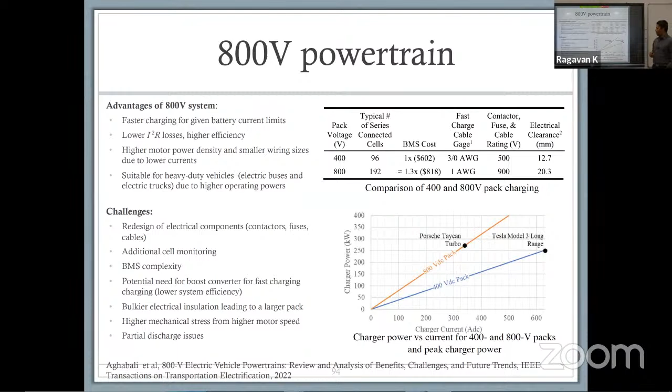So once again, in terms of the comparison, what this does to your battery pack, right? In terms of the pack itself, if you are at 400 volts, you end up going to a BMS that costs you about $602. At 800 volts, you go up to about $818. The gauge size basis is 3 versus 1, and your contactor fuse rating goes from 500 to 900 volts, and the electrical clearance also needs to go up correspondingly.

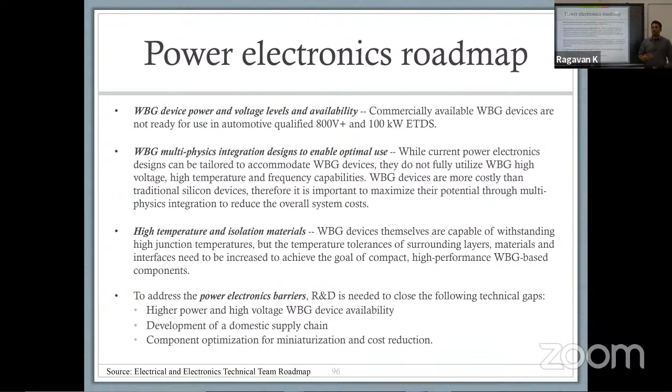Or even if you are having to outsource a lot of your expertise, that adds to the cost, which is why a lot of companies start to bring it in-house so they can actually do the manufacturing and the development themselves. So strategy-wise, here's what they put out in terms of what these numbers should look like.

So if you look at the potential pathway for getting to $3.3 per kilowatt, you need to first deconstruct the traditional component boundaries. You cannot start thinking in isolation. You have to take that apart. Then component integration, and then of course here you have multi-physics integration, additional component integration, and then device application. So basically what I've been talking about these last 5 days, it summarizes at least the idea behind that.

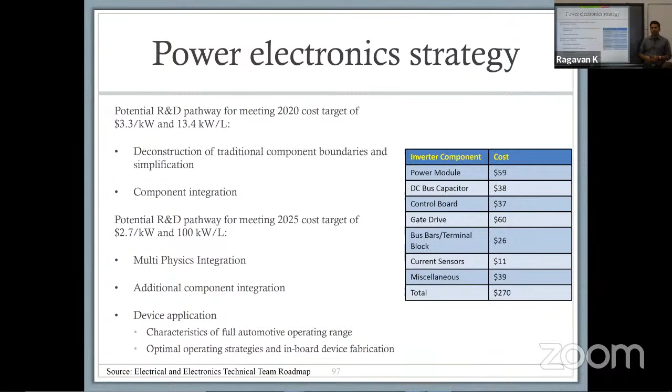In terms of cost though, you need to have a power module that costs you less than $59. You need to have a bus capacitor that's going to be less than $38. To see what that looks like, you have to look at your market. Because if you want to meet that target, this is how they came up with the numbers. They added all of them together, and then they said $270 is what it should cost. Right? So the same thing, if you look at electric motors, the same idea applies.

Low cost, high efficiency steel, and of course our pet topic of removing rare earth materials. We need to find a way to get permanent magnets that are just as good, or you need to have motor designs that are just as good. In a lot of cases, you might compensate for one with the other. That might be an acceptable trade-off, but it is something you will have to prove. In terms of the dollar targets, you need carbon nanotube-based copper materials. We need to characterize their design and long-term characteristics, and replacement of magnets with soft magnetic materials.

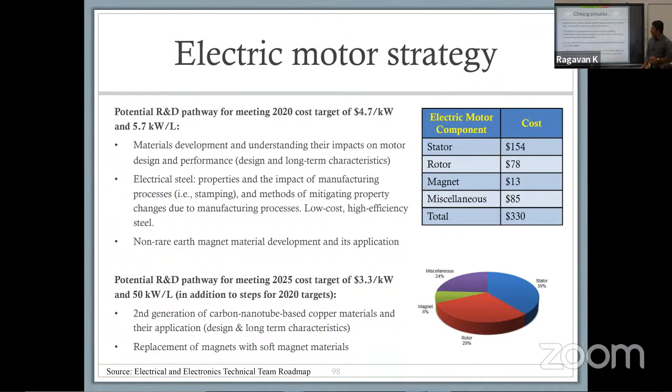So with that, I wanted to take it to our closing remarks. No matter which country you're from, whether you live in the US, India, Singapore, China, you name it, everybody right now is looking at options for HEVs and EVs. The market is very hot. There's a lot of work going on, and the challenge is there is a lot of work going on. As a researcher, I will say there's lots of advancement that has been done, but there's a lot more that has to be done.

I've only been in this area for a couple of decades now, but even in the last couple of decades, what I know is barely scratching the surface. There are a lot of details I'm still learning in real time, and you find out every single day what you don't know. The more you acknowledge and accept that, the better it's going to be. Otherwise, you'll end up stuck in a place where you might not move forward as quickly.

And of course, cost and all-electric range are two very important aspects. What you are selling is very important. People care about how much they pay today. People care about what it looks like, but more importantly, people care about how much they're going to pay for running it, right? Cost and cost. Look is great, but right now most cars look great.

You can have something that looks like a Lamborghini, but the reason the Lamborghini is so popular, arguably, is because it's a Lamborghini. Right? I don't have one, so I cannot even make that statement here. But if I was to buy it, I would buy it because somebody says you're driving a Ferrari. I'm not going to ask you how many seats does it have?